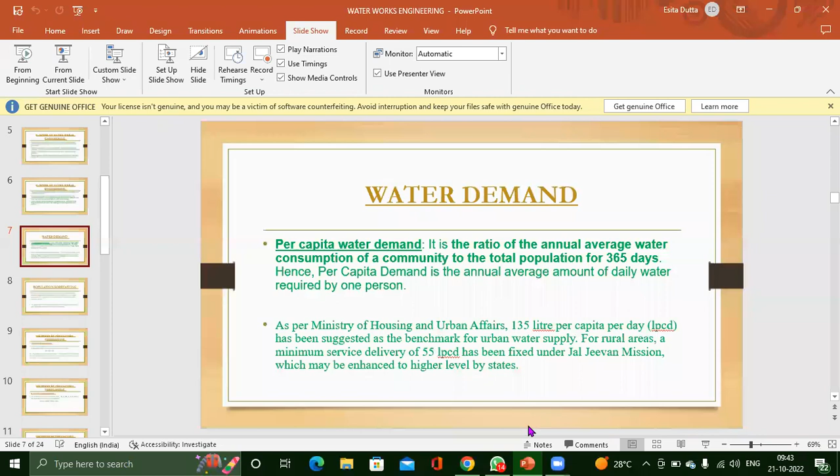Hello. So today we will start a topic known as waterworks engineering.

First, we will talk about the purpose of waterworks engineering, or the benefits, or why we are using this waterworks engineering technique. Water engineers ensure the safe delivery of water for irrigation and human consumption, as well as the effective removal or recycling of wastewater.

Water engineers have many responsibilities, both technical and non-technical. They ensure that citizens are provided with a continuous supply of clean, uncontaminated water for drinking, living, and recreational purposes. Water engineers not only design water management systems but often oversee the construction and maintenance of the systems as well. So from these points, we can say that water engineers basically look after the wastewater treatment procedure.

That means wastewater should not be given to human beings for their use and drinking purpose, for irrigation as well as human consumption and other works that human beings do. For that, they should supply clean, fresh water that should be uncontaminated, not contaminated, for drinking, living, and recreational purposes. For the human society, the water provided should be uncontaminated.

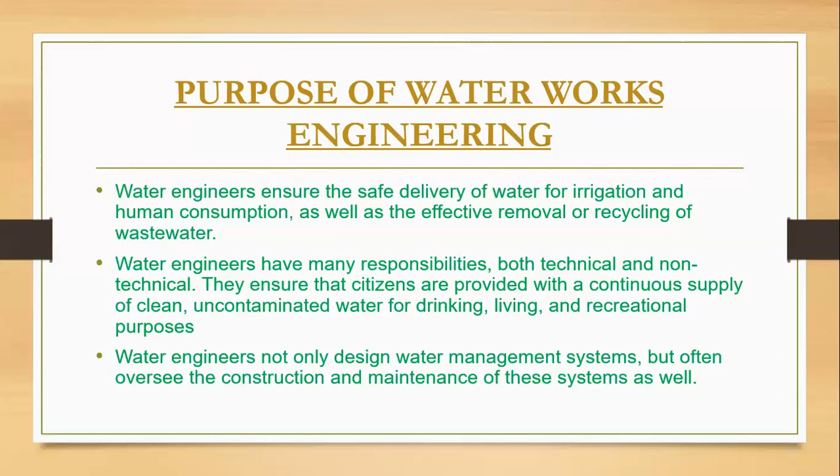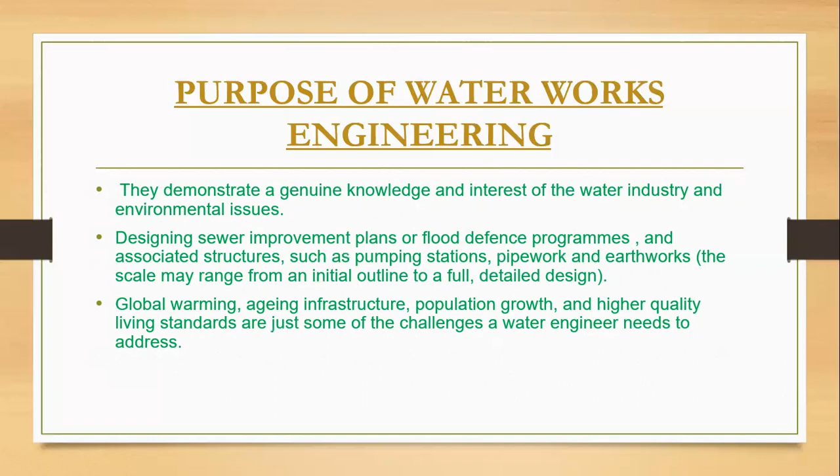They demonstrate genuine knowledge and interest in the water industry and environmental issues, designing sewer improvement plans or flood defense programs, addressing global warming, aging infrastructure, population growth, and higher quality living standards. These are some of the challenges a water engineer needs to address. So a water engineer keeps in mind the environmental issues, that is, the problems that can be caused due to wastewater, like soil pollution and water pollution, which are harmful for human beings.

Next subtopic is water demand. Water demand, in easy language, is the amount of water which is required by the human population in 365 days, every day, for the human population.

In scientific terms, we have brought this big definition into a smaller one: it is the ratio of the annual average water consumption of a community to the population for 365 days. So per capita demand is the annual average amount of daily water required for one person - the amount of water required by one person for 365 days, that is water demand.

Next comes population forecasting. What is population forecasting? To know how much water is required for the population, we should know how much the population is. So how will you determine the population? These are the methods by which you can determine it.

Population forecasting is defined as a method of determining the expected population for a particular design period of a water supply system with the help of study and analysis of future events and available records. That means determining the expected population in an area.

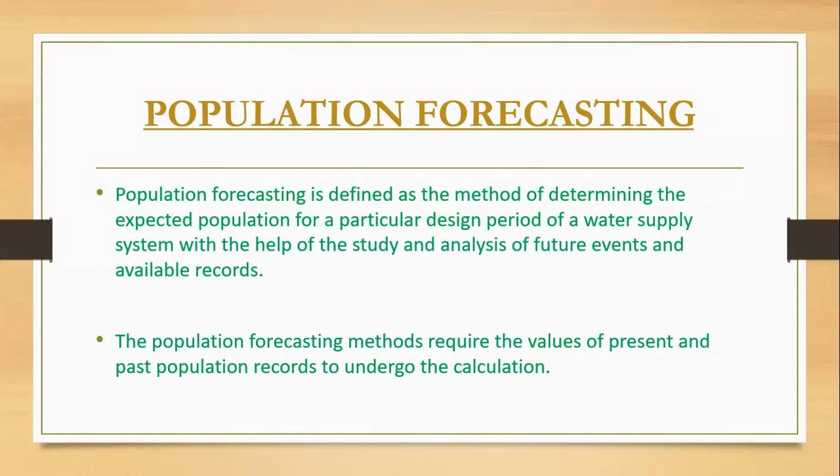What are the methods? The first method is the arithmetic increase method. Where can we apply this method? In areas where it is found that the rate of increase of population with time is constant - time is increasing, but the rate of increase is constant. The equation is given by dp/dt equals constant, where Pn equals population of an area, Po is the last known population, and n equals the number of decades.

Next is the geometric progression method. This method is for the condition where dp/dt equals kgp. You just need to know these methods, you don't require the details right now. For this particular presentation, you just know what the methods are - details I will come up with later.

Fourth comes the decreasing rate of growth method. This is applied to a city that owns a limiting saturation population, meaning after a certain period of time, it will be saturated, it will be filled up.

Next, a very important part: the stages of waterworks engineering. What are the stages? First stage is collection of raw water from sources. Second, treatment of raw water. Third, distribution of treated water. Fourth, treatment of wastewater. So the first one is source of raw water.

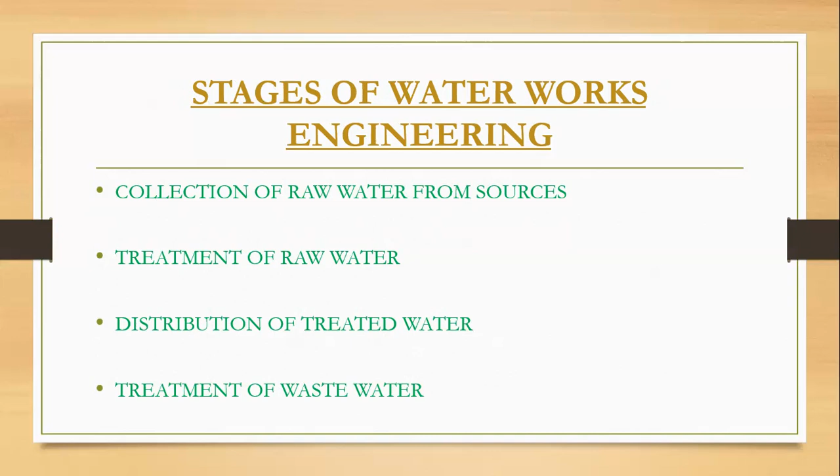We all know raw water comes from rainfall, groundwater, wells, lakes and rivers. From here the raw water is collected, and it can be contaminated as well as uncontaminated. Now we will treat the raw water.

This is the raw water system. The exact components of the raw water system depend on the quality of water being drawn, in relation to the quality of water being needed.

I have told you that raw water can be contaminated as well as non-contaminated. So after I draw raw water, I have to check how much contamination there is. If the contamination is very high, I need to treat it very well. If the contamination is minimum, a small amount of treatment will do. So I have to keep in mind what is the quality of water that I have drawn, compared to the quality of water that I need.

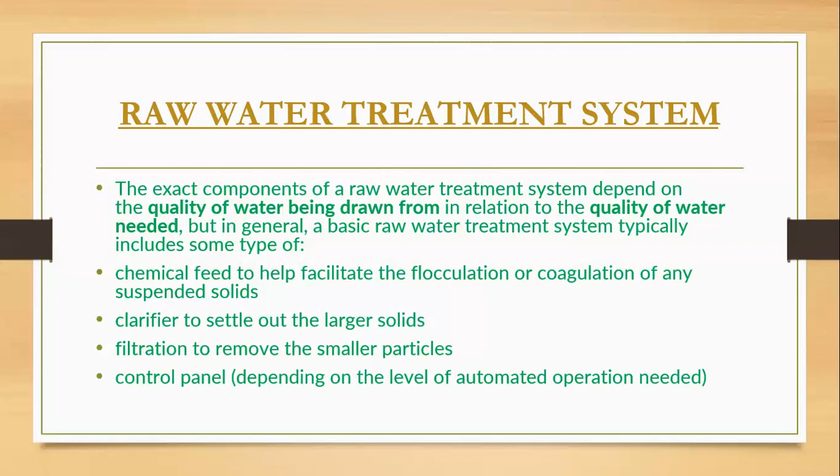Chemical feed helps facilitate the flocculation or coagulation of any suspended solids, since certain chemical treatments happen. Clarifiers settle down the larger solids, then filtration and control panel. So these are the ways through which we can treat raw water.

This is the diagram. See, raw water goes to coagulation, flocculation, sedimentation, disinfection, and finally it is distributed for home consumption.

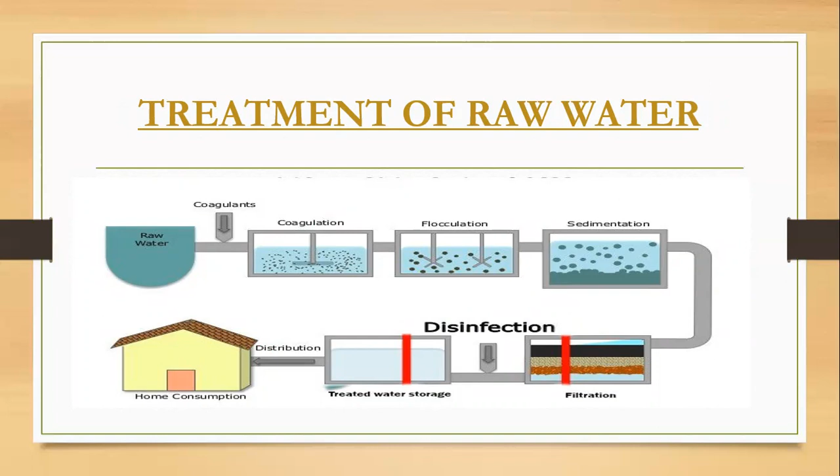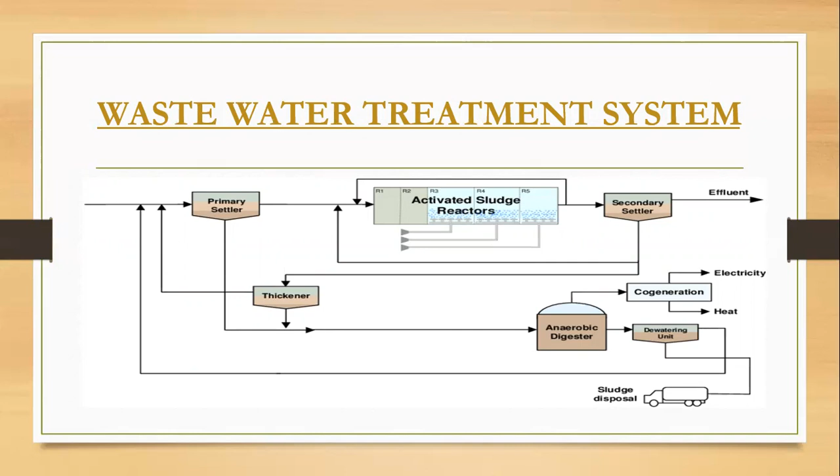There are three major methods through which we can treat wastewater: primary, secondary, and tertiary. Primary involves sedimentation. Secondary involves soluble organic matter and solids that escape primary treatment. Tertiary is known as polishing, which disinfects water to the highest standard.

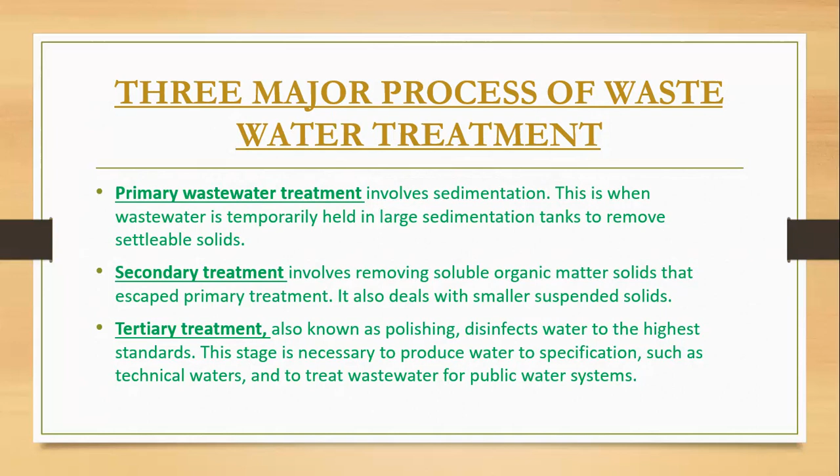So primary means the very basic methods involved. In secondary treatment, those who escape primary treatment, those who cannot be treated with primary treatment, are treated by secondary treatment. And lastly is tertiary, which treats to higher standards.

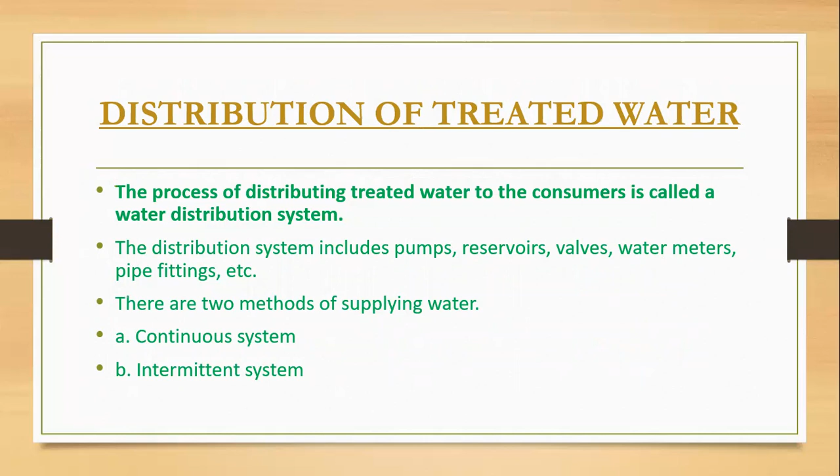Next, the water is distributed to the households. Distribution has two methods: one is continuous, another is intermittent system.

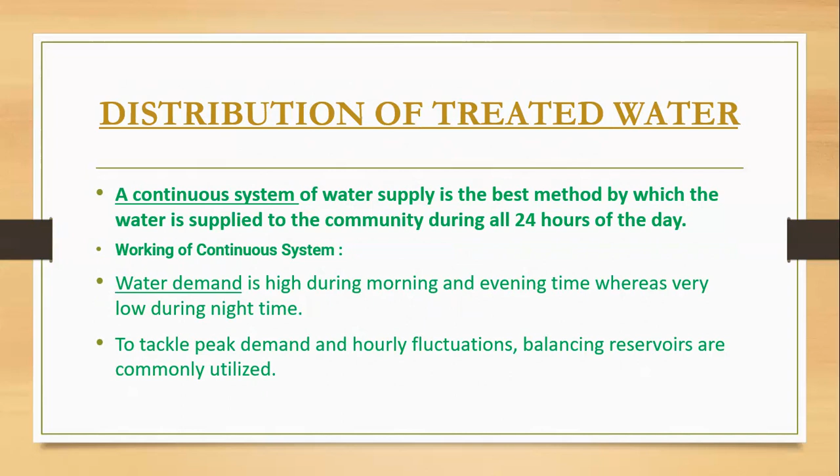Continuous system is one where water is supplied to the community during 24 hours of the day - you can get water supply 24 hours. Intermittent is for a particular fixed time in a day or on alternate days. Remember: continuous means 24 hours, intermittent means a fixed time period of a day or alternate days.